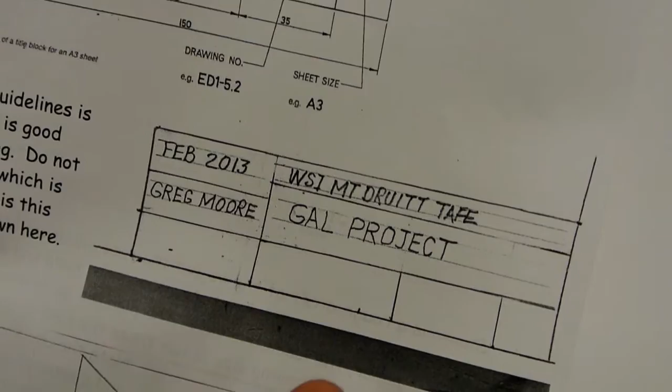Now that we've got the borders done on the sheet, it's time to go ahead and think about putting the name box down in the corner. And this is what the finished name box will look like, and we'll have a date in it, and we'll have some other details about the drawing.

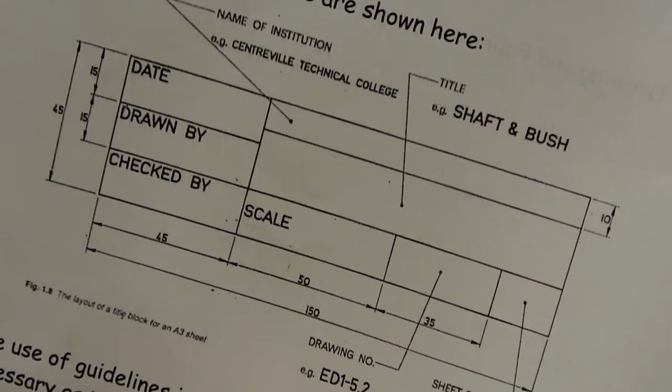The dimensions for the name box I've given on a handout, and the dimensions are shown here. It's 150 millimeters wide by 45 millimeters high. So I'll go ahead and I'll draw that now.

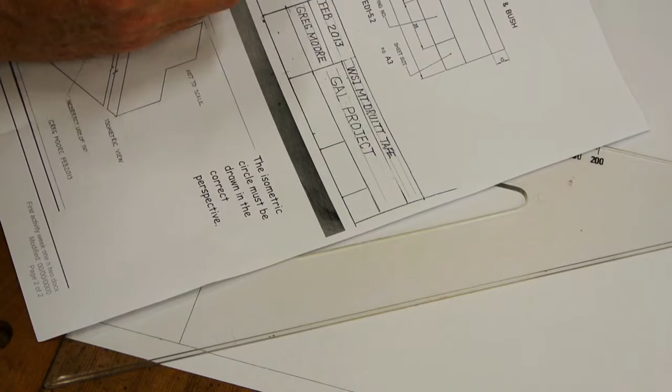The drawing shows here that I have a line starting 15 millimeters up from the edge, and another 15 millimeters past that. So 45 divided up into 3 lots of 15. Again, I've come in 45 millimeters from the left-hand edge, and I've done a vertical line up there.

No. Can we keep the noise down a little bit, people? If you're being so noisy, you're probably not being productive.

We're 10 millimeters down from the top of the box with the next dimension. So I'll simply put a mark for that, and then the beauty of having a T-square is that we can come and sit the T-square on that dot, and then we're going to get a nice square edge, exactly the right dimension down from there. So there's the name box done. It only took a few seconds to draw that name box on there.

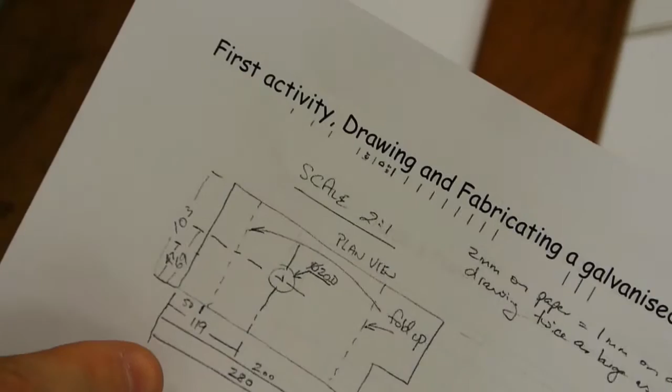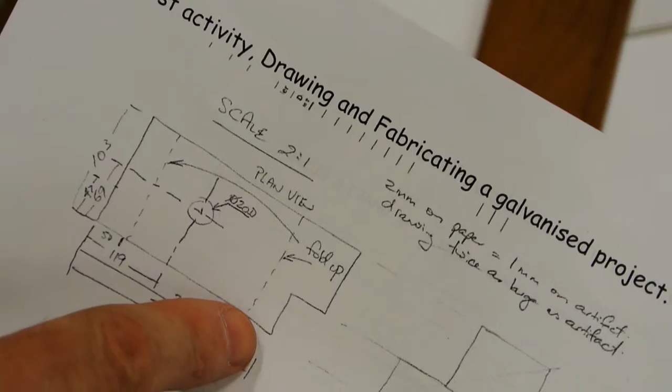Looking at the drawing that we've got, we can see that the dimensions here for this 2:1 drawing will be 103 millimeters high by, well, it's 280 millimeters to this point here, and we'd have to look down to this other drawing, 327 millimeters we need for the overall length. So I'm going to have to make sure I fit that high enough up in the top left hand corner of the page to make sure that I can fit the front elevation underneath it.

I've just done the vertical side at 103 millimeters, and now I'm mapping out that 327 millimeter line. So I've used the T-square to come along, and I'm continually cleaning the T-square too, because it does have a lot of grubby stuff underneath, and I did notice it's starting to put some marks on the drawing here, which is a bit of a shame.

I need to mark out 327, but the set square only goes to 200, so I'll need to put a mark at 200, and then I need to come down a bit further, and I can put a mark at another 127, because we need 327. And then I'll use the T-square to come along to that mark. Everything being done with the T-square. The T-square is the secret to getting a drawing done correctly. So now I can come up off this far end.

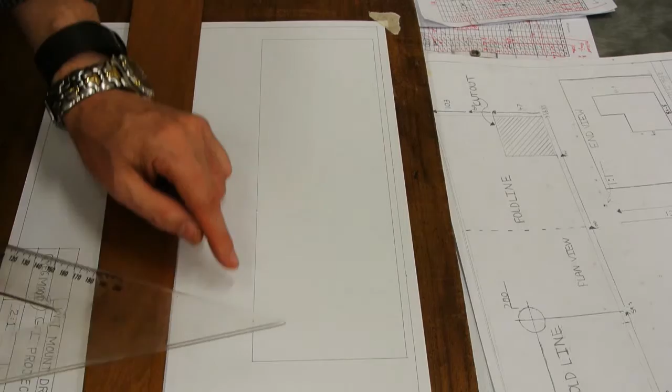Now I'll go ahead and I'll think about doing some dimensions. I can use stacked edge reference dimensions on the side, but I want to use superimposed running dimensions edge referenced on the bottom, because I do have a front elevation to fit in here against some fold lines. So I don't want to crowd myself into stacked dimensions that come down the page. So again, T-square over here, and then time to map out some of these dimensions off my drawing.

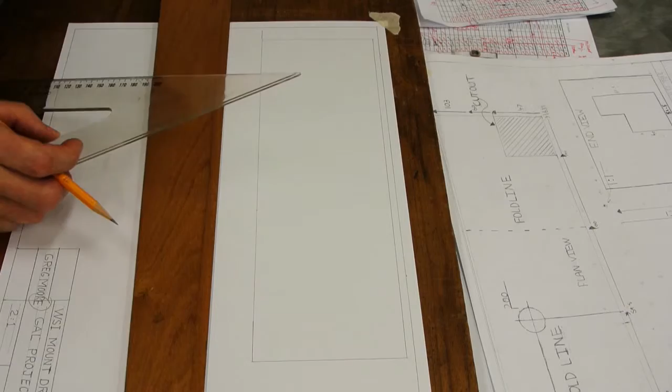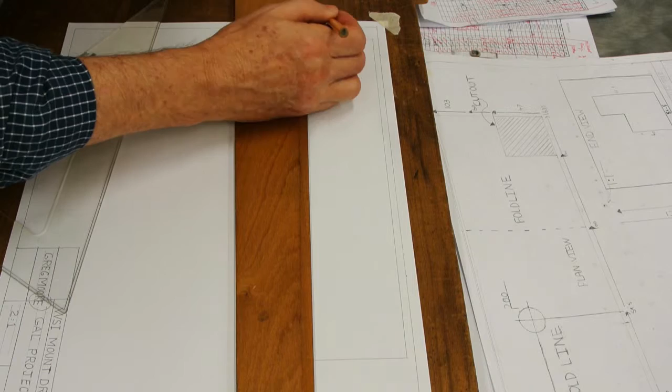So I've got first line at 47 millimeters up, so I'll mark that out. I've got another one at 69, and then I've got the 103. So, come out with each of those with a small vertical line. And then using the set square, and then I'll be able to label each one of those. Now, labelling those, it's nice to have some guidelines as well.

So the first one is 47 millimeters. We don't need to write the mm because all technical drawings are in millimeters. The second one, with a bit of a guideline on there, is 69. And I've gone a little bit close to the edge here, so be careful with that. The overall size is 103, and that shows clearly that it comes up there. So I've got 103 to the top, I've got 69 to there, and I've got 47 to there.

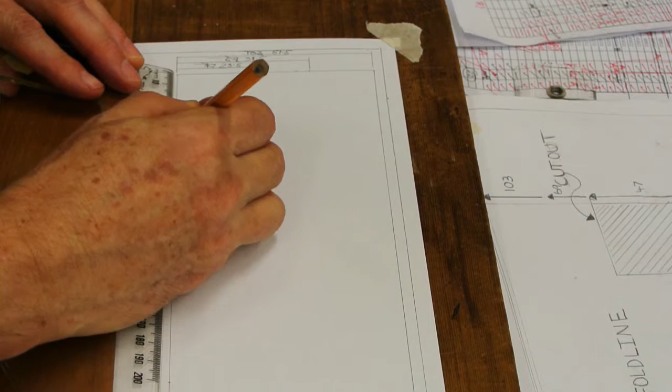Superimposed running dimension, I only have one line going along. I have the first break at 50 millimeters. Then I have one at 119. Notice, unlike architectural, I'm not moving the rule each time and duplicating the error throughout the job. I'm working edge referenced to each point. So 200, I've got one, and I've got one at 280, so I need to add 80 to that 200.

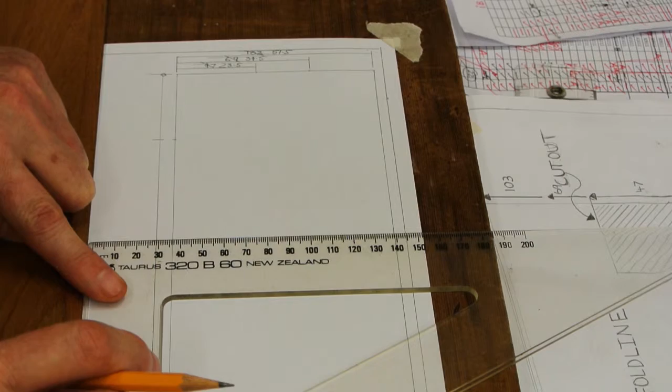So I'll put the dimension line in, right to the end, and then I'll put a circle on this end that represents that it is superimposed running dimensions. And then just break that line.